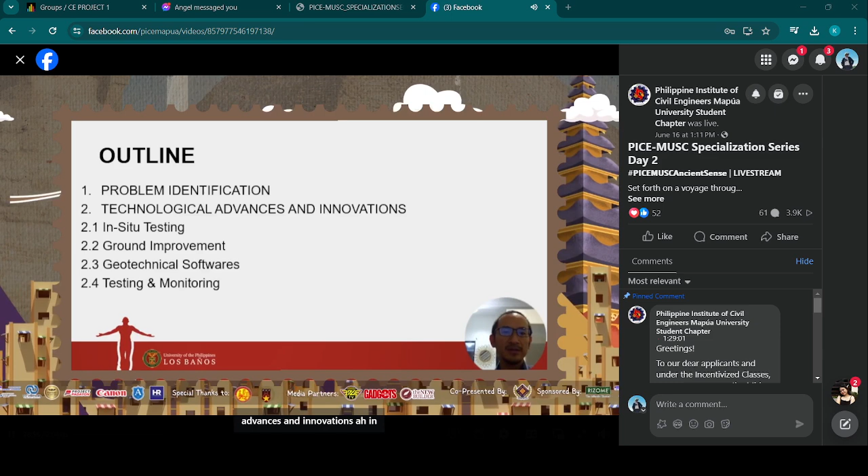So for the outline of my presentation, before we discuss innovations, landslides or ground improvement, let's identify what the problem is. Then for the second part, we're going to talk about the technological advances and innovations in geotechnical engineering. Hopefully I can include my work experience and my current work as professor in the Department of Civil Engineering here in UP Los Baños. The question we need to answer is why is there a need to innovate? The innovations I will discuss are in the context of the Philippine setting.

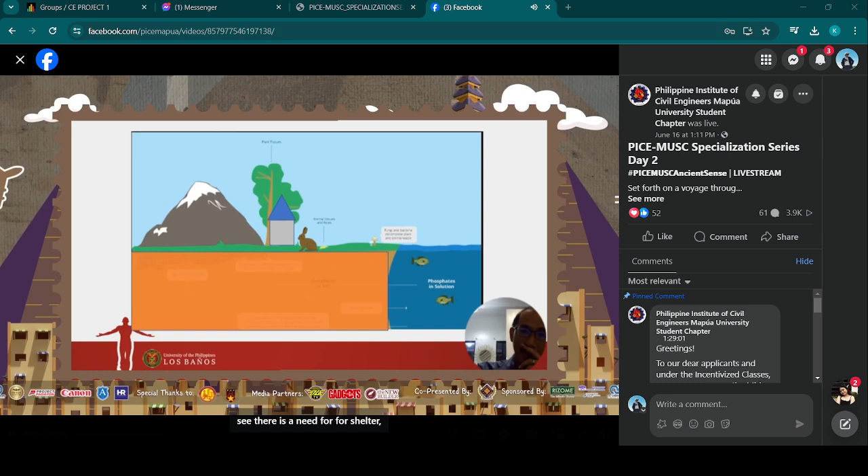So first off, as mentioned in the outline, let's talk about what the problem is. In this figure, we can see nature as it is. The problem starts when man interferes with nature. Man will create housing, since there is a need for shelter. So ang gagawin ng tao is gagawa siya ng bahay. In the process of building this house, makikita natin na maaapektuhan niya itong puno, so mapuputol itong puno. Hindi din magtatapos. Man will build further, since dumadami yung population ng tao, so there is a need for more housing.

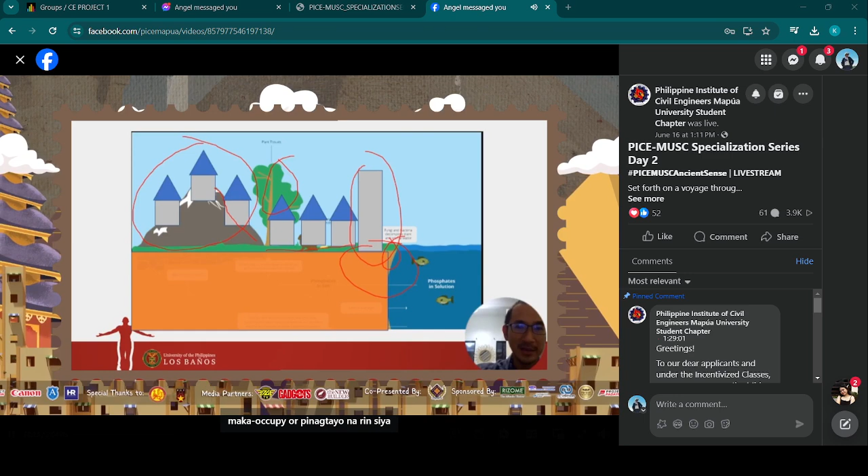Hindi pa din magtatapos ang intervention ng man sa nature. Since wala nang space, natayuan niya na yung flat area, so naputol niya na yung puno. Nagtayo na rin siya ng mga high-rise na building para mas maraming maka-occupy, o nagtayo na rin siya sa bundok na medyo matarik.

Pero hindi pa din magtatapos ang problem. Magre-reclaim na rin siya sa body of water. So when I say reclaim, tatambakan niya ito ng lupa, then magtatayo siya ng further structures. You can see this happening right now sa atin sa Manila Bay - madaming reclamation projects ang nangyayari doon.

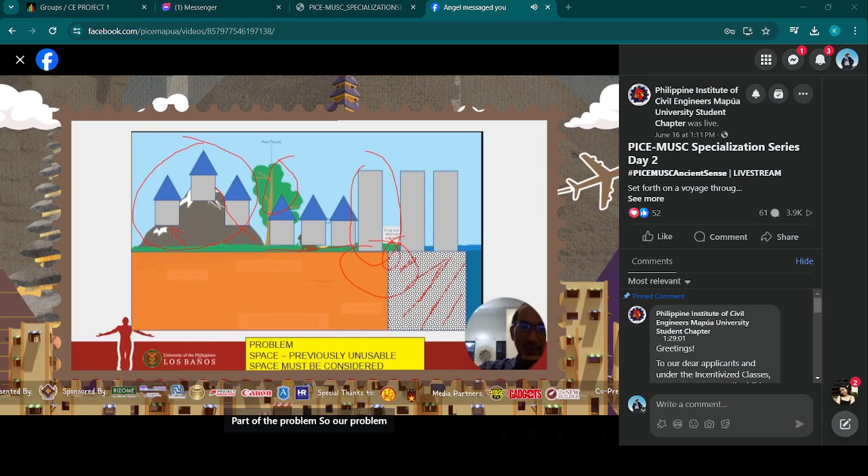So part of the problem, our problem identified is space. Since dumadami yung population, previously unusable space must now be considered for human expansion. So that's problem number 1.

So in situ soil. First off, before defining in situ soil, let's start by defining some civil engineering materials that we learned in class.

Concrete is an engineered material. Pwede nating i-modify ang concrete strength, FC prime of concrete - it can vary from 2,500 to 6,000 PSI. Kaya nating specify yan, basta sasabihin lang natin doon sa concrete supplier natin kung ano ang concrete strength na kailangan. It can either be 28 days or early strength. Depende pa rin sa requirement ng tao, it can be engineered.

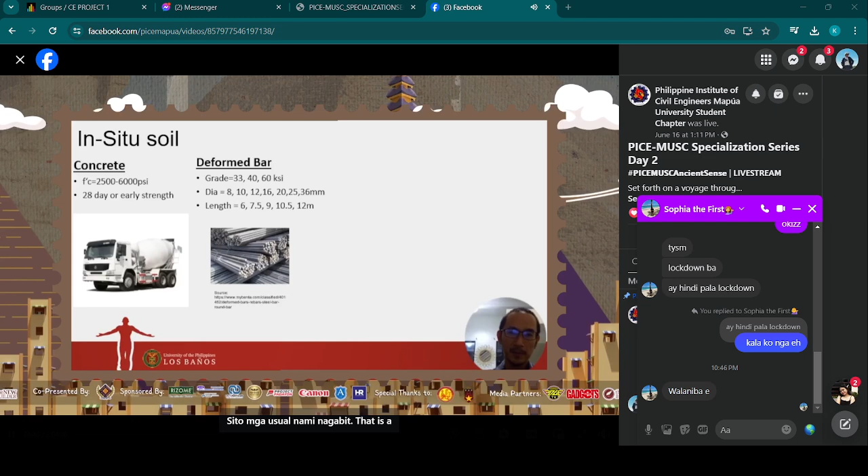Deformed bar, so steel - it is available in grade 33, 40, 60 KSI. The diameter can be 8, 10, 12, 16, 20, 25, 36 mm. The length can be from 6, 7.5, 9, 10.5, 12 meters. This is also an engineered material, man-made. Ito yung mga usual na ginagamit natin sa construction.

Structural steel is available in different shapes and sizes. Strength as per specifications, length I believe 6 to 12 meters. In this figure, this is a wide flange. I believe nakapag-steel design na naman siguro kayo, so I think you're aware of this material.

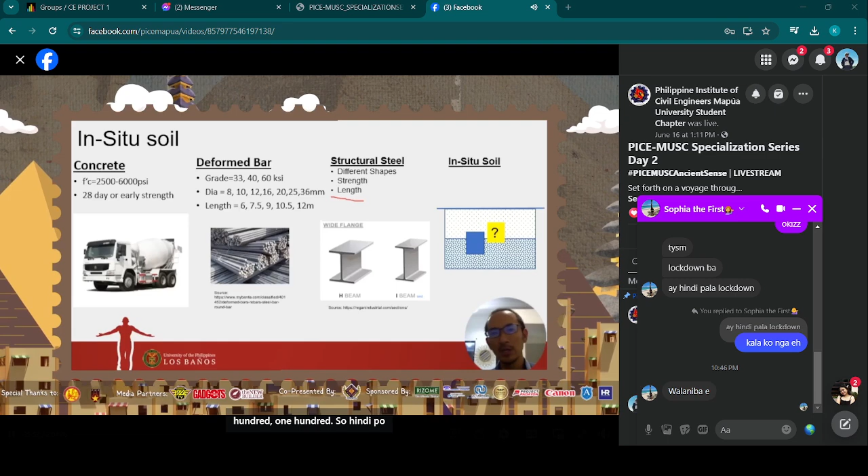Well now, tumbukin din natin yung ating main point - in situ soil. In situ soil is a question mark, hindi siya engineered material. Pag pupunta tayo sa site, yung lupa doon, it is as it is. Hindi natin pwedeng utusan yung soil na magkaroon siya ng bearing capacity na 300, 200, 100. Hindi po pwede yun - it is what it is.

A problem with sands is it can be a problem if it is in a loose saturated state - saturated, basa, all the voids are being occupied with water.

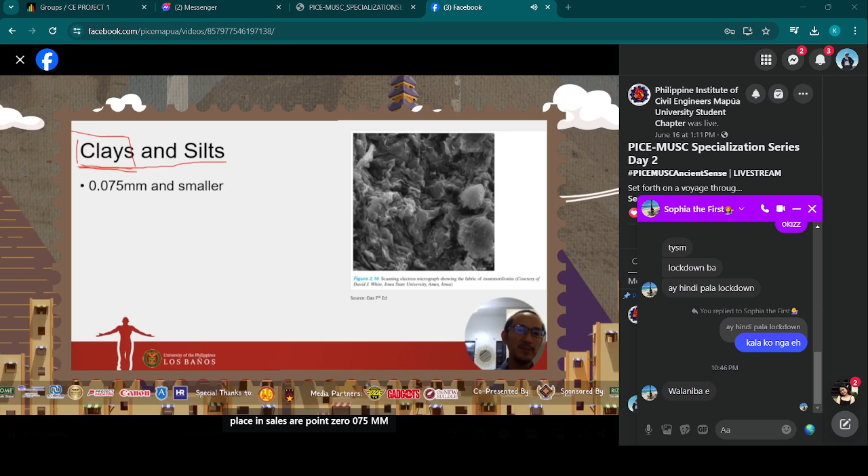The next major classification of soil is clays. Particularly mag-focus tayo sa clays and silts, pero mag-focus tayo sa clays. The figure on the right is a picture of clays - kung makikita nyo, hindi siya ganun kasing linis ng picture ng sands as compared to kanina. The range of size of clays and silts are 0.075mm and smaller - these are what we term as fine grained soils. Its consistency can be termed as soft to hard.

Further classification - ang difference ng silts versus clays is silts is inert, hindi siya active, while clays are very active pag nahahaluan ng tubig. The problem with clays is its high affinity for water - may absorb 100 times its own volume. It can also shrink or swell - it has high shrink swell potential, or a high potential for volume change. As a note, it is because of clays that geotechnical engineering was born - dahil sa problems na na-encounter ng man sa clays, kaya na-born yung geotechnical engineering profession.

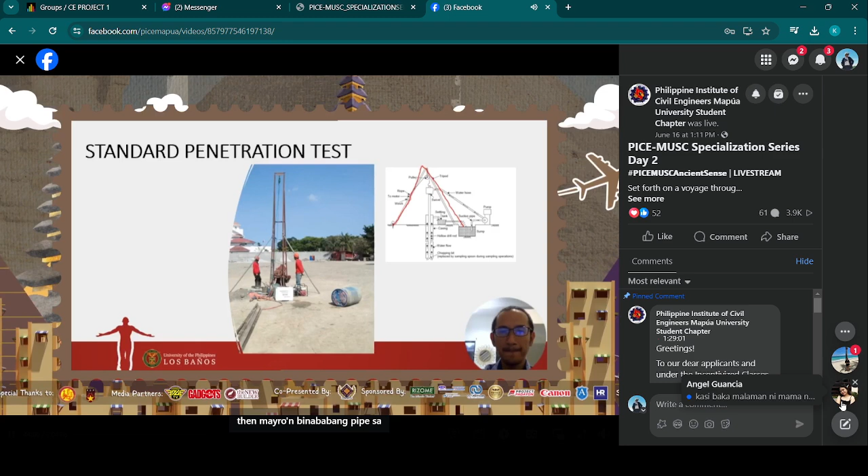So the objective of the standard penetration test is to obtain soil samples, to approximate the in situ soil strength, and to measure the ground water table through the hole drilled in the ground.

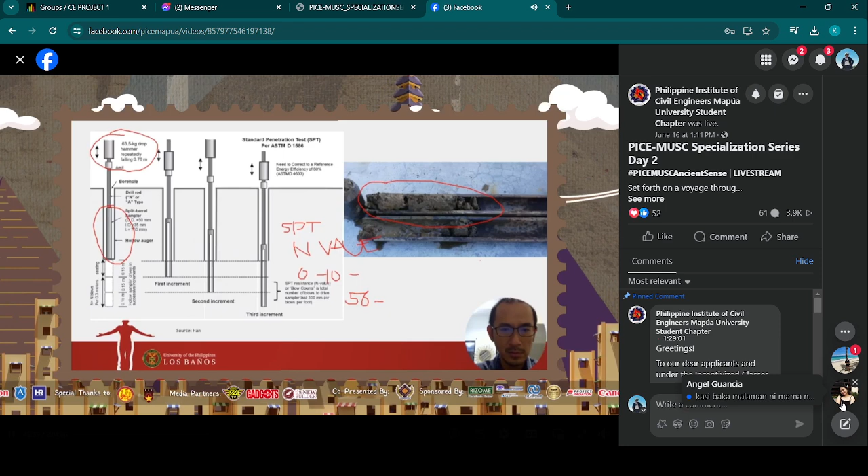So the problem with the SPT is it's prone to human error and it is slow, because the process is somewhat manual.

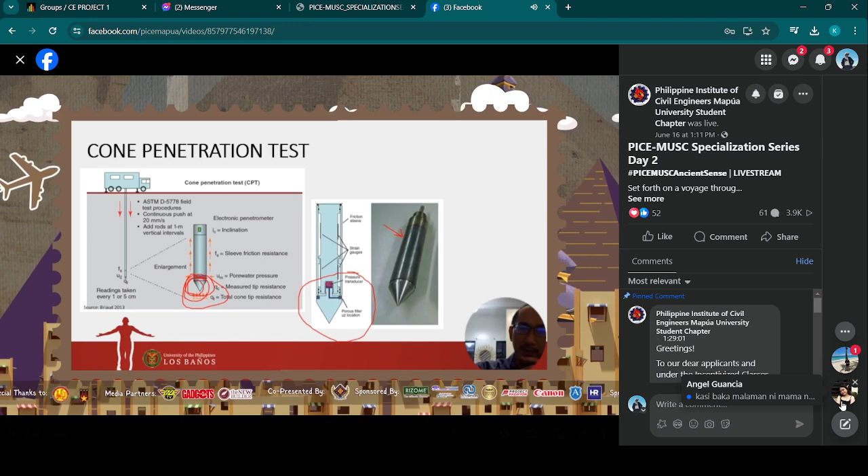So ang limitation lang nito is this is ideal for soft to stiff clay and loose to medium dense sand only, kasi nga tinutulak lang siya. So after ma-reach niya tong stiff clay or medium dense sand, titigil na, or madadamage na yung cone. Kaya hindi na pwede siyang gamitin after that.

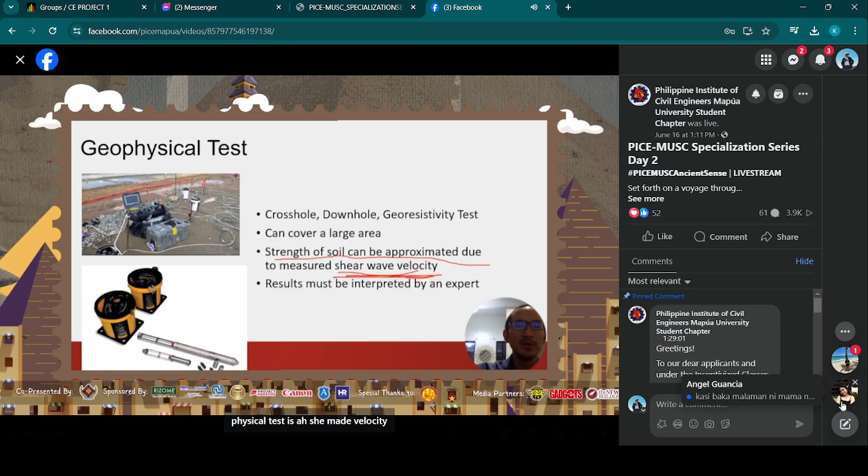So geophysical test, these are more on electronic test na rin. Marami siyang types - cross-hole, down-hole, georesistivity. Advantage nito is this can cover a large area, at yung strength of soil can be approximated due to the measured shear wave velocity. Ang makukuha po natin dito sa geophysical test is shear wave velocity, and results must be interpreted by an expert.

So another purpose of geophysical test is to detect cavities. So dito sa project site, dahil sa geophysical testing, na-identify yung merong mga voids dun sa cavity sa site. So ito po yun.

So very important po yan kasi ayaw natin na yung building natin ay papatong sa mga ganyang site. Kung merong mga voids, kailangan meron tayong gawing engineering intervention.

So understanding the geology of the site would be very helpful for this project. Tong Boracay Island, very famous siya na medyo maraming voids dyan sa area.

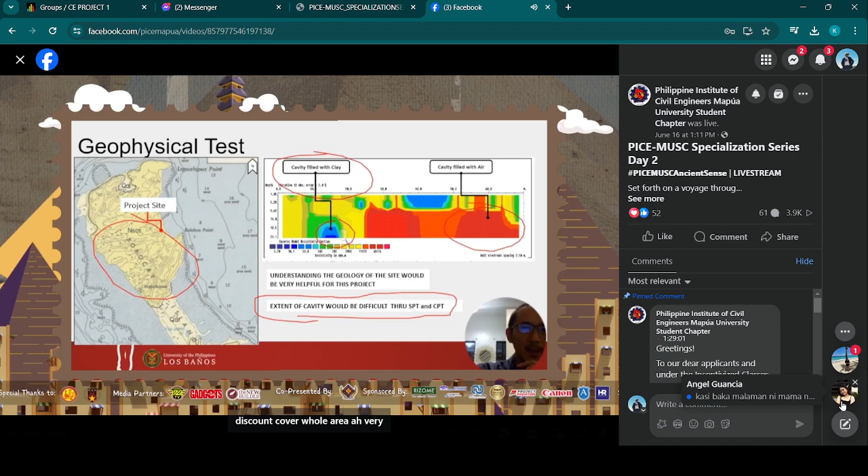So the extent of the cavity would be difficult through SPT and CPT kasi single point lang yung minimeasure natin. So dito sa geophysical testing, this can cover a whole area, very wide area.

So as a summary sa mga diniscuss kong in situ testing: for SPT, disadvantage is slow. For CPT, advantage niya is accurate for soft to stiff clays, pero may encounter refusal after medium dense sand and hard clays. Geophysical testing can cover a large area on one test alone, so this needs a pre-drilled hole usually from an SPT borehole.

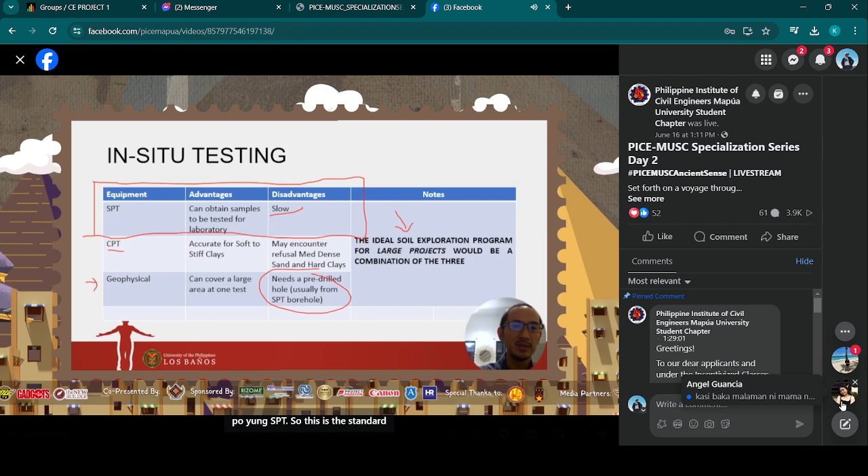So a note for this testing is the ideal soil exploration program for large projects would be a combination of the 3. Pero kung yung mga typical na testing natin for a 3-story house or a 2-story house, okay na po yung SPT. So this is the standard na ginagamit natin dito sa Pilipinas.

So now, let's move forward to ground improvement. So this is a question that I ask my students in my introductory geotechnical engineering class.

So the question is: if I stomp my feet on the ground with loose sandy soil, am I performing ground improvement? The answer po dyan is yes. When you're stomping on the ground with loose sandy soil, you are performing compaction of the ground, kasi yung energy tinatransmit nyo sa ground ay nagkakaroon siya ng reaction na nalalessen niya yung voids dun sa soil.

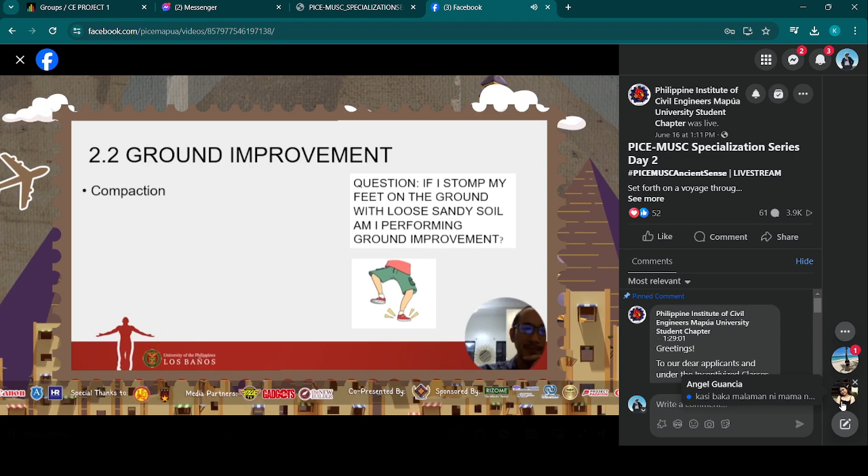So yung mga ground improvement methods na i-discuss ko sa presentation na ito: compaction, soil replacement, geosynthetics, ground improvement using grouting, ground improvement using stone columns, then screw piles - maybe hindi ko na ito idiscuss.

So based on my MS teacher, basically nung 2000 and earlier, so 1980s, 1990s, meron lang - I believe tatlo - na klase. So tatlo lang yung ginagawa natin dati.

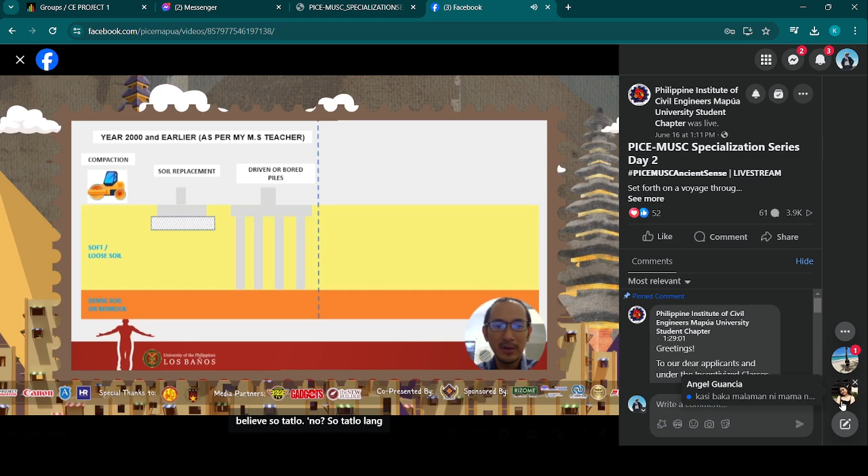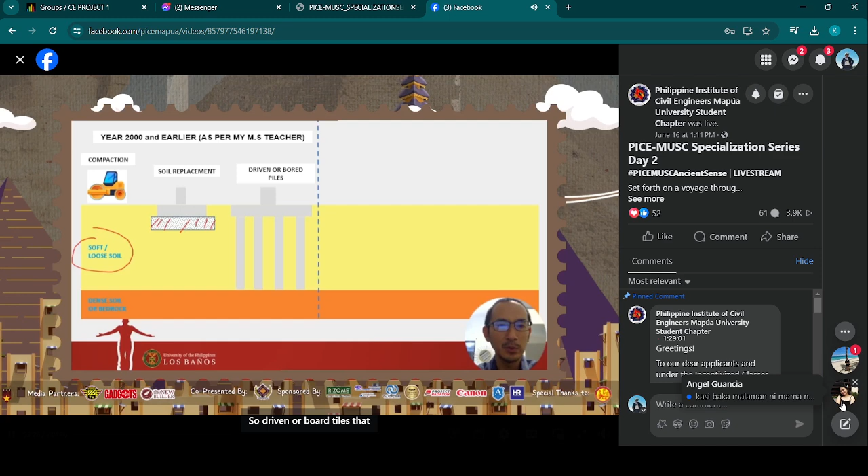So either compaction - kung ang soil condition ko ay soft or loose soil, pwede ako mag-compaction. Soil replacement - ibig sabihin papalitan ko yung soft and loose soil underneath ng aking pundasyon, papalitan ko siya ng engineered fill. Or I will resort to driven or bored piles, na ang concept ay to transfer the load from the building to the competent strata, which is the dense soil or the bedrock.

So as we innovated, as nagkaroon ng maraming research, dahil nga yung solutions dati available was either deep or for shallow foundations, so nagkaroon ng innovations. So marami ng ground improvement techniques ngayon. These are ground injection, jet grout or stone columns, or screw piles. So this can be an alternative to driven or bored piles or soil replacement.

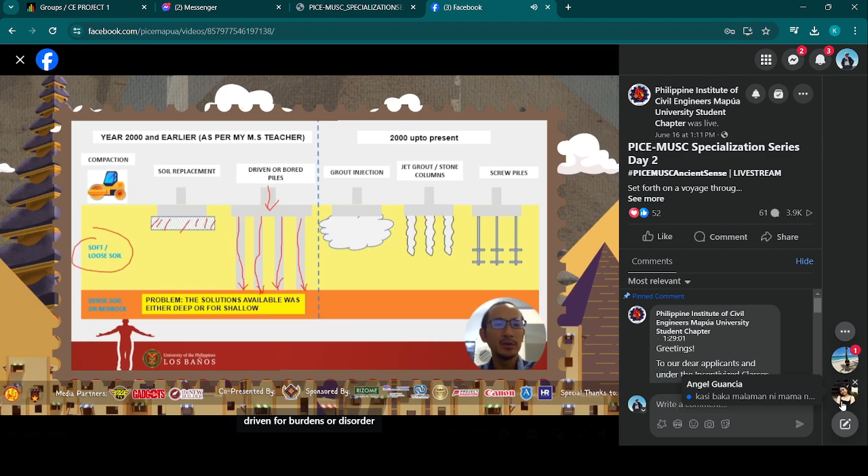So sa ground improvement, these ground improvement methods can be an alternative to deep foundations. So, compaction equipment. This is a smooth wheel roller, so vibratory roller. This provides 100% coverage, and take note, this is best for cohesionless soils. So sa mga sandy soils, this is best for that.

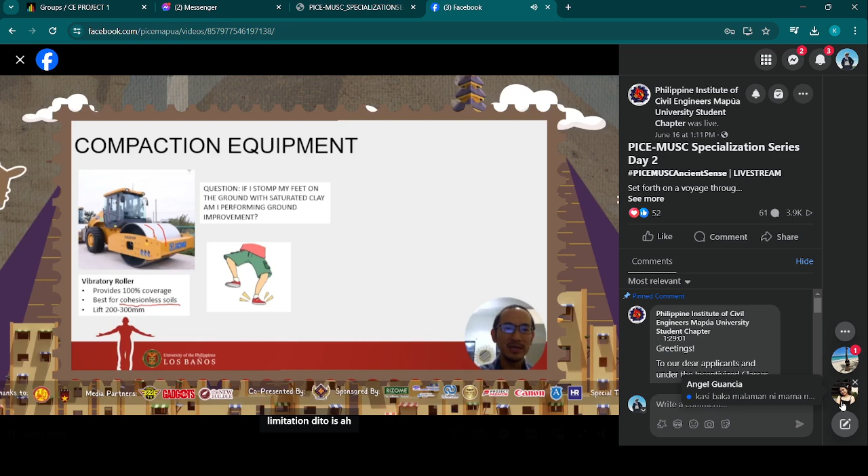Ang limitation nito is related to this question. If I stamp my feet on ground on saturated clay, am I performing ground improvement? Kung naalala nyo, this is the same question kanina, but kanina ang sinabi ko is loose saturated sand. So ngayon, if I stomp my feet on ground with saturated clay, am I performing ground improvement? The answer to that is no.

So magkaiba po ang properties ng sand sa clay. If you use the same method, if you're stamping your feet, you're simply gonna displace the clay. So ang answer po dyan is no. So ang ideal method po to use if you have clay soil on your site is a sheep's foot roller. So ito po yun, meron siyang mga large projections sa kanyang drum.

Unlike dito sa figure on the left, smooth wheel roller siya. This is best for cohesionless soils. And the sheep's foot roller is best for cohesive soils. Pakitandaan po yun kasi marami pong hindi nakaka-alala nun sa site, sa actual practice.

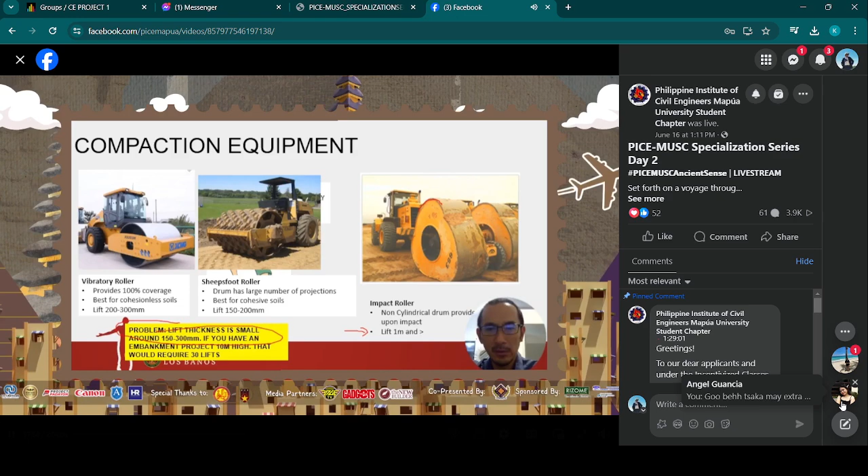Another thing that I would like to discuss, we're done with compaction, so geosynthetics. Geosynthetics are manufactured fabrics made of polymer that are used in soil, and they have the ability to separate, filter, reinforce, protect, or drain. Marami pong types of geosynthetics: geotextile, geogrid, geonet, etc. And each of them has its separate function. Geotextile will check all the boxes.

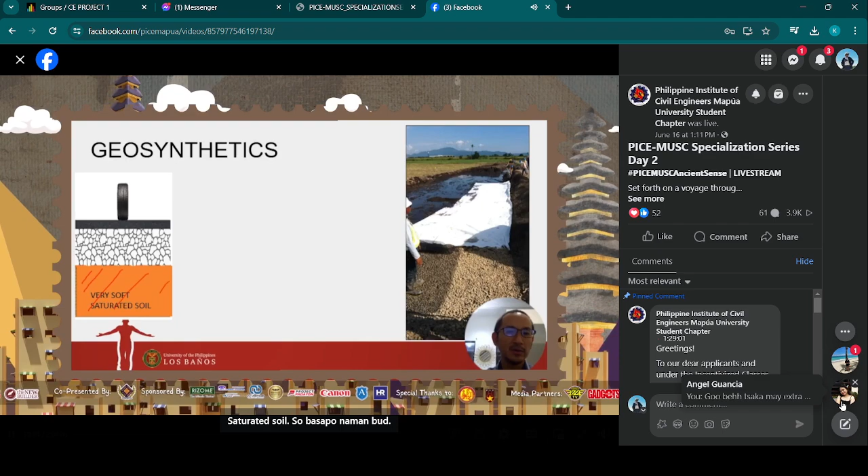Tingnan lang natin in a nutshell kung paano siya gumagana. For example, we have a road project. Ang in situ soil natin is very soft, saturated soil. Basa po na malambot yung ating lupa. We will put these stone layers, which are our base course, and this is our pavement, and ito po yung top of pavement natin.

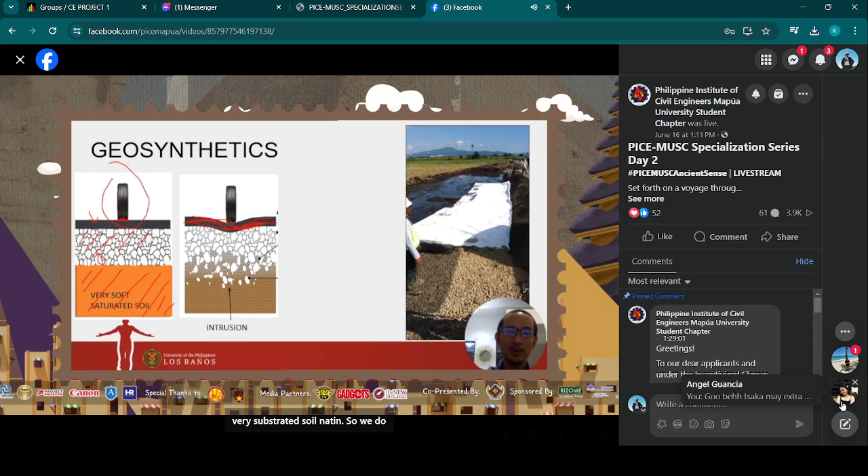So what will happen pag ito po ang ginawa natin? Magkakaroon ng intrusion, kasi yung gravel layers will intrude sa ating very soft saturated soil. Kaya yung mga pavement natin, kasi ang design niya as flexible, nag-fail, dahil nagkakaroon ng intrusion. Yung base course layer natin is humahalo dun sa very soft saturated soil. So we do not want that to happen.

That is where geosynthetics comes into play. Lalagyan natin siya ng geotextile separator. The function of the geotextile separator is para hindi humalo yung base course layer dun sa very soft saturated soil. An example is in the figure on the right. Makikita natin yung soft saturated soil layer, naglatag tayo ng geotextile, then eventually lalagyan din natin ng gravel layer. This is an embankment project.

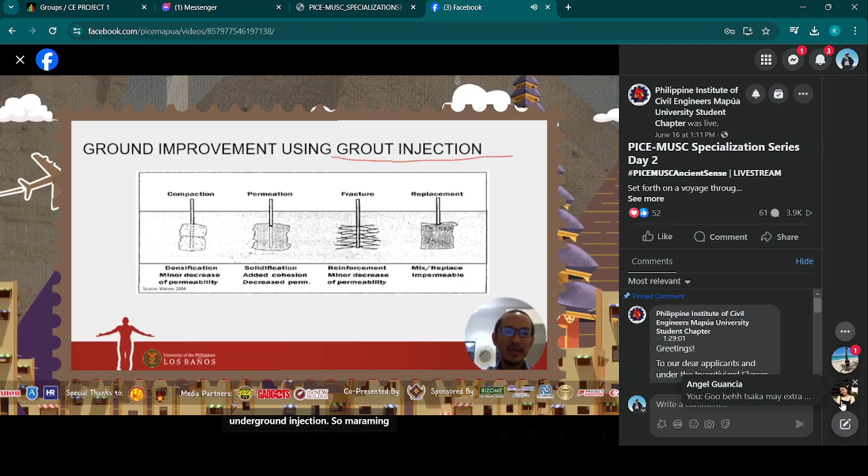So that is basically the function of the geotextile in this case. Moving forward, let's discuss innovation and ground improvement. There are many types of ground improvement. One type is ground improvement using grout injection. Under grout injection, marami pa ring types: compaction grouting, permeation grouting, fracture grouting, and soil replacement. I will leave that up to you for your studies.

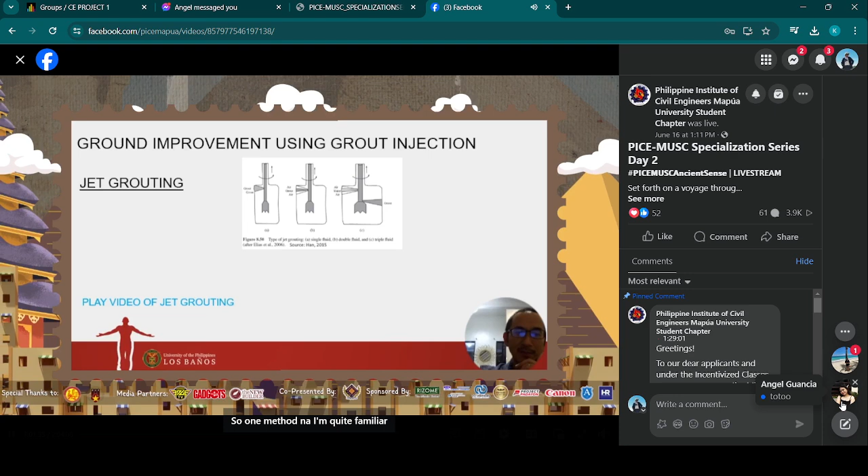So one method I'm quite familiar with is ground improvement using grout injection, particularly by use of jet grouting. So basically jet grouting is a method wherein we inject high pressure cement into the ground and we mix the cement with the in-situ soil.

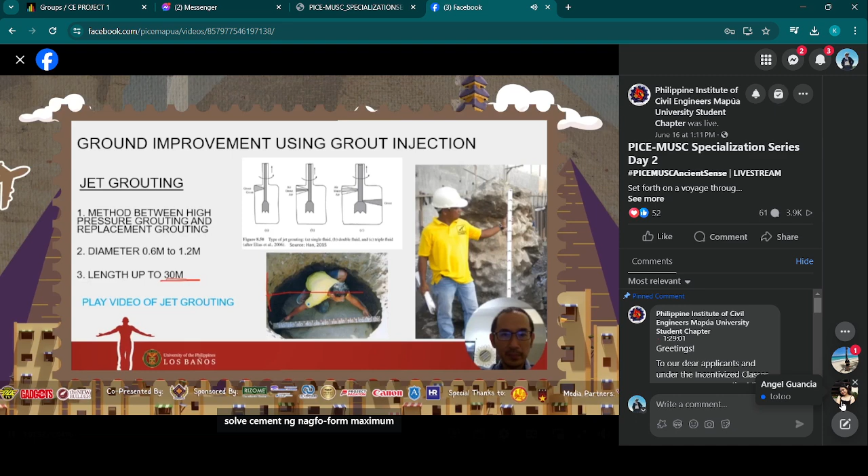So the diameter of the soil cement formed is around 0.6 meters to 1.2 meters. As per my experience, the depth that can be jet grouted can reach 30 meters. Unfortunately, I can't play the video of jet grouting, but these are some pictures. So the diameter of the soil cement formed, maximum as per our experience, is 1.2 meters.

Then this figure on the right is an example of a jet grout soil cement column. We just pulled it out of the ground as per client specifications, because the client wanted to see if soil cement is really being formed. So this is the proof that jet grouting was effective for this project.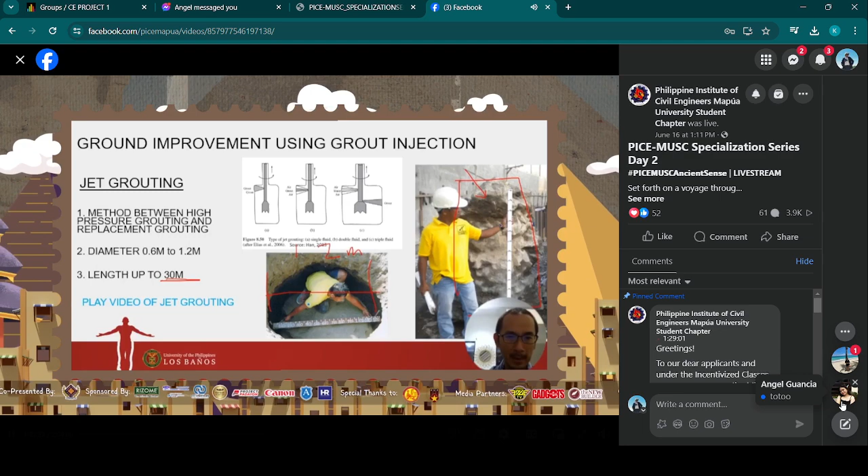So basically, based on this figure on the left, what is particularly good about jet grouting is it is applicable for all soil types, from gravel, sand, silts, and clays. Problems identified with grouting are the quantification of the grout or the cement that we are putting into the soil and the measurement of the corresponding improvement.

So the next topic that I would like to discuss is about slope stabilization or slope stability. Before we get into slope stability, let's first discuss the basic concept of a slope. In the figure on the left, this is our slope, and this is the sliding plane. What we need to consider is the weight of this slope mass and the strength at this interface.

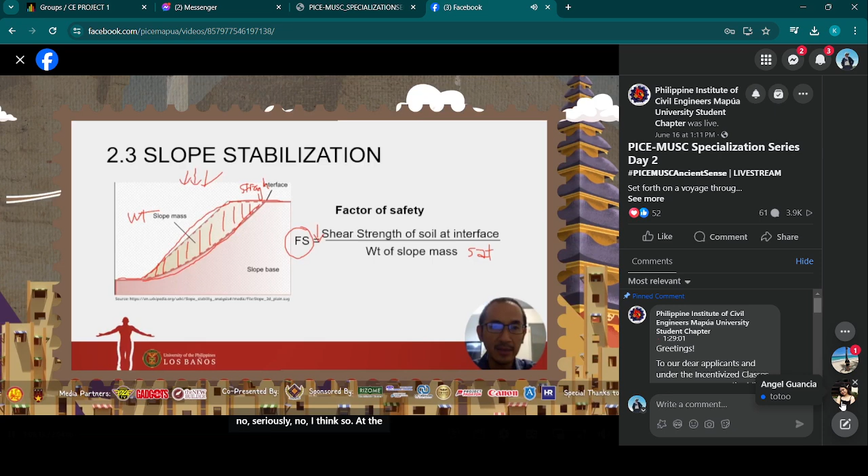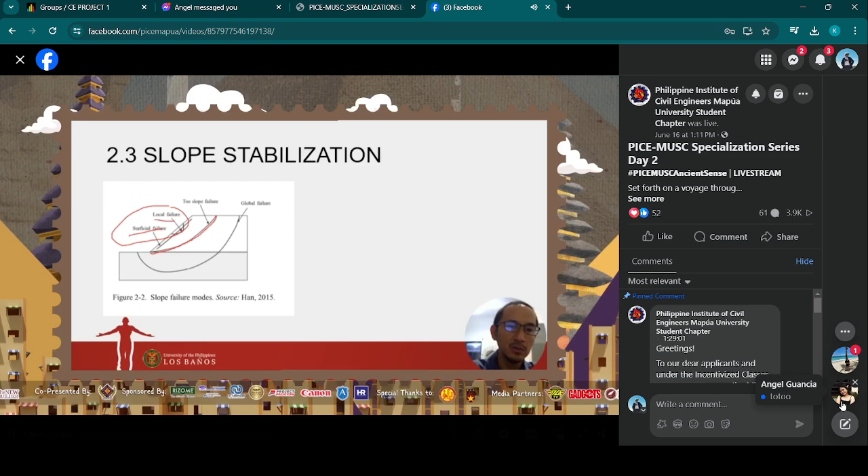There are basically four types of failure. Superficial failure and local failure are the shallow types of failure, more like erosion type. Toe slope failure is where the slip circle ends at the toe. Then global failure refers to deep-seated landslides, where the failure radius is large and extends beyond the toe.

In my experience, of all the subfields in geotechnical engineering, slope stability is the most critical. You might ask why I say that. Because the failure of a slope may lead to loss of life. That's what we most want to avoid. That's what's frightening about slope failure: it may lead to loss of life.

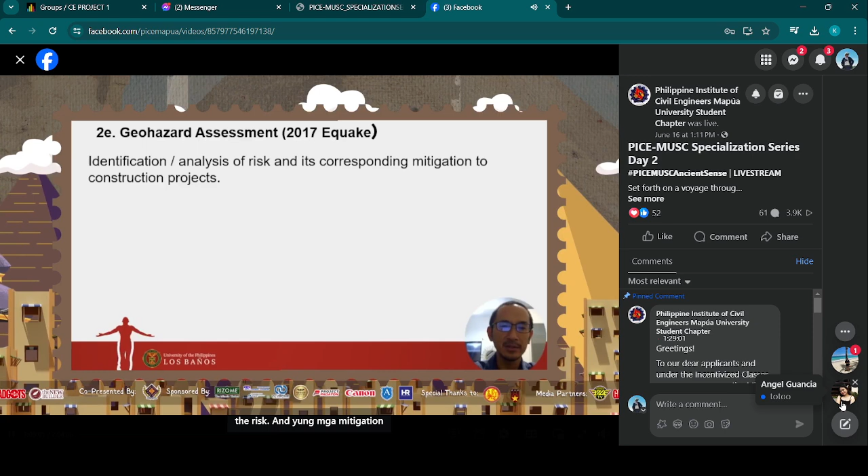So in the following slide, these are my experiences in slope assessment or slope stability. This is a geohazard assessment project in Leyte, because of the 2017 earthquake. So basically my task there was to identify and analyze yung risk and yung mga mitigation sa mga construction projects ng company namin at that time.

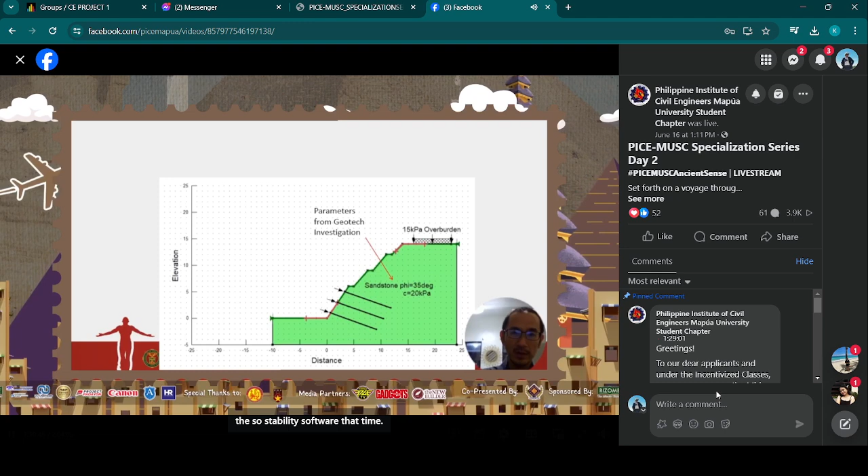So what I did there, ang ginawa natin is nagkaroon tayo ng design. So analysis and design. So this picture now is from the slope stability software na ginamit ko that time. So this is the building for your reference and this is yung ating cut slope. So dahil kinat natin yung slope, kailangan natin i-analyze for slope stability yung ating slope. So these are the parameters that I used. So based on the geotechnical investigation, bato yung ating site. So ito yung corresponding cohesion and friction ng ating site.

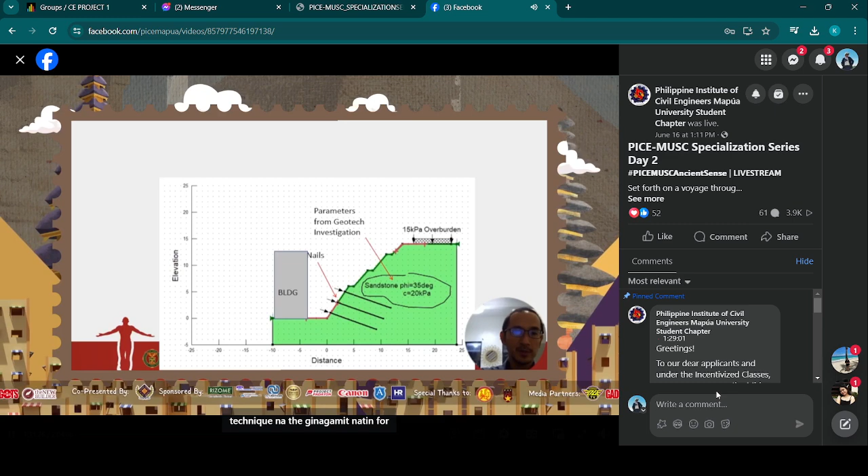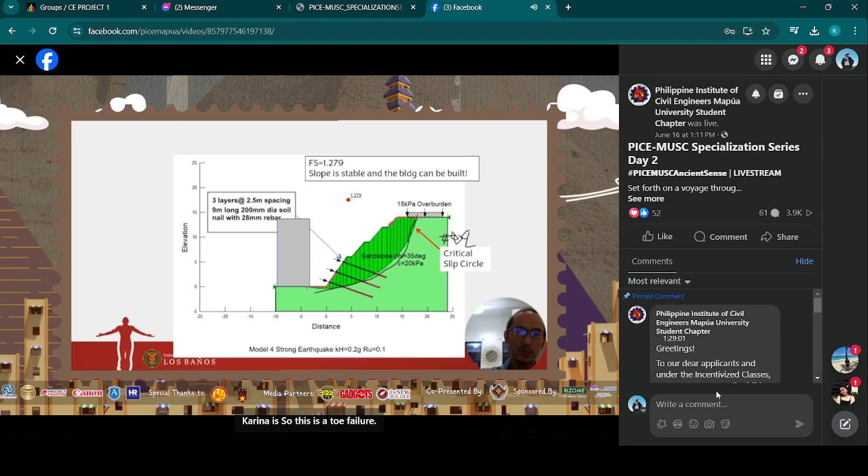Then I introduced nails. So these are soil nails. So these are common technique na ginagamit natin for slope stability, so slope stability mitigation. So pag meron na tayong input, then meron na tayong mitigation, then we can proceed with yung analysis natin. So based dito sa ating analysis, yung critical slip circle na produce ng ating analysis is, if naalala niyo yung kanina sa figure ko, this is a toe failure. Kasi malapit sa toe yung ating failure.

Then ang FS niya is 1.279. So for slope stability analysis, basically we want a factor of safety greater than 1. So dito sa ating example, FS is 1.279, so we can conclude that the slope is stable and the building can be built.

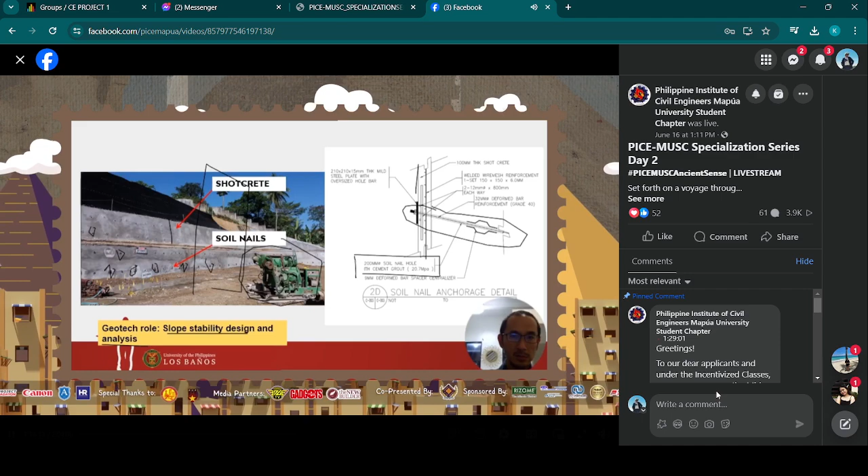So the next topic that I would like to discuss is about the recent advances in geotechnical softwares. Siyempre, slope stability. Then let's talk about SSI and ito, no? So yung most recent na ginagamit is yung GIS mapping. So basically, you can perform slope stability using manual calculation or, yung time namin during the masteral, Excel pa yung ginagamit namin. So the problem with Excel calculations is you can only analyze one slip circle at a time, and kailangan mo mag-analyze ng multiple slip circles. So kailangan mo gumamit ng AutoCAD, Excel. So napakatrabaho niya. You can analyze only one slip circle at a time.

Then ang naging improvement nun is yung mga slope stability softwares. So this is a two-dimensional na slope stability software. Ang naging advancement nito is nakaka-analyze na siya ng multiple slip circles at any given time. So mas naging madali na yung analysis and mas naging convenient na.

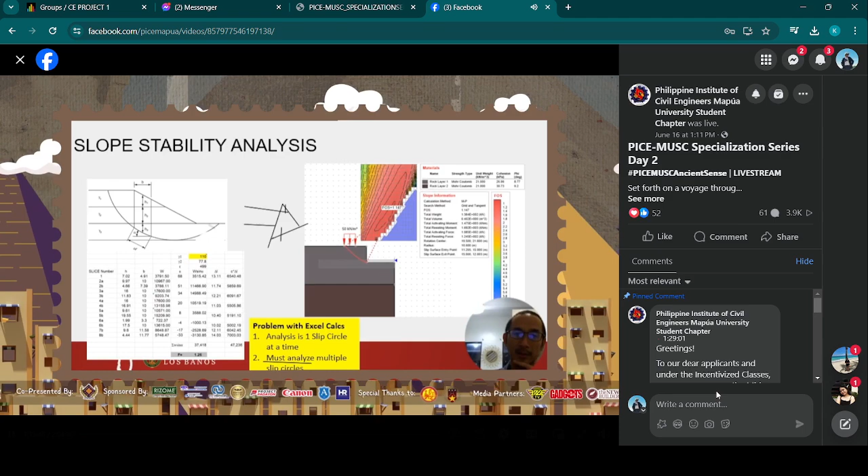Then recently, meron nang lumalabas ng mga 3D slope stability analysis software. So these are very powerful softwares na nasisimulate niya talaga yung actual ground condition. So merong nag-offer ng mga free na dati. So one is yung Plaxis. Kaso ngayon wala na yata.

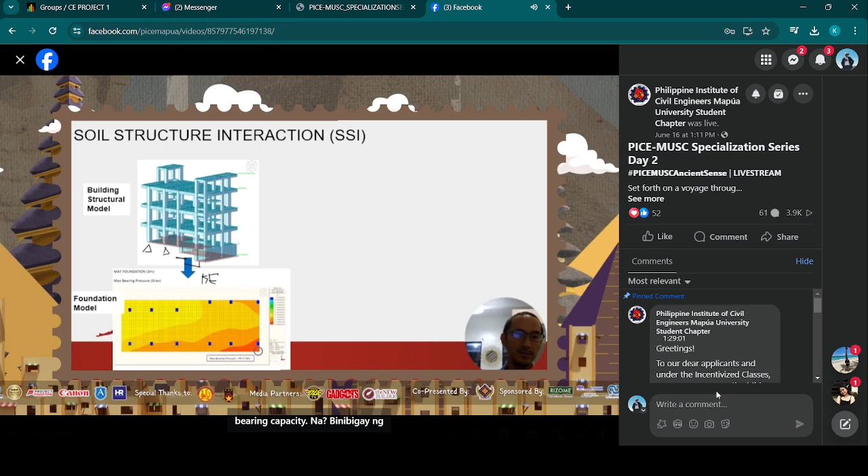So then you design your foundation. So this is also the role of the structural engineer. So ang nagiging basis mo dito is yung bearing capacity na binibigay ng geotech. Bearing cap. Sorry, paano nasulat? So basically, this is the role of the structural engineer.

Then on the figure on the left, this is a geotechnical analysis software. So basically, we're simulating yung foundation na ginawa ng structural engineer. Then we're doing a settlement analysis. So this one, sorry, medyo malabo lang. Pero basically this is settlement analysis. So this is being done on 2 or maybe 3, tatlo pa nga, no?

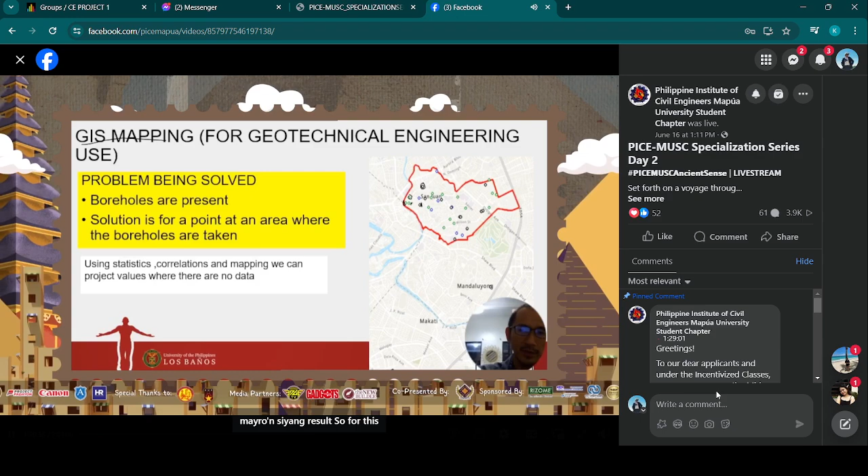So what we want, we want to utilize GIS mapping para maka-generate tayo ng bearing capacity map for this particular area. Kasi marami tayong data at any given points, so gusto natin gumamit ng GIS mapping using statistics, correlation, so we can project values kung saan walang data. No? So kung dito sa area to wala, we can use GIS mapping. So para siya na yung mag-interpolate ng data dito sa mga walang data, then we can come up with a bearing capacity map. So an example nito is this bearing capacity map from Biñan, Laguna.

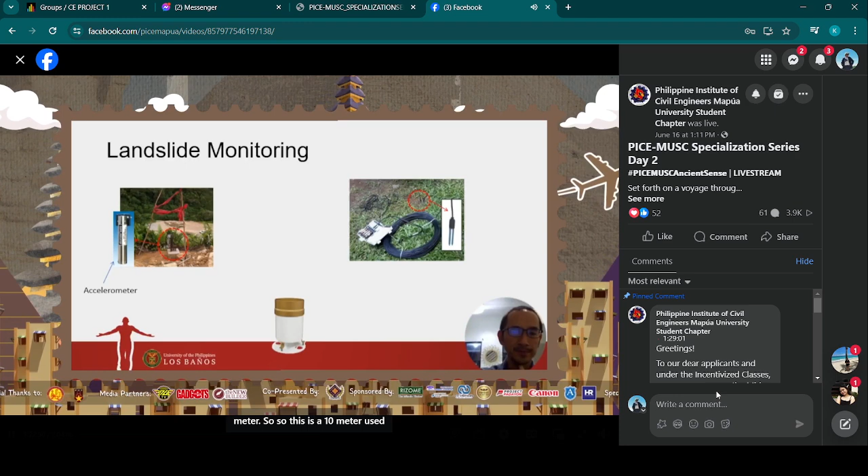So, advances in testing and monitoring, particularly in landslides and deep excavation monitoring. So for landslide monitoring, these are typically what we use, particularly sa ginagamit namin sa company namin dati. So we use a tilt meter. This is a tilt meter using the concept of an accelerometer. What we want to detect in the tilt meter is movement or tilt along the slope.

We use soil moisture sensors para makuha natin yung moisture content at any given time sa slope. Then we use a rain gauge, which measures the amount of rainfall at an area of interest. So the combination of the three: the tilt meter to measure tilt along the slope, the soil moisture sensors at varying depths along the slope, then meron tayong rain gauge. Lahat ng data ng tilt meter, soil moisture sensor, and the rain gauge, papasok yun lahat dito sa ating data logger.

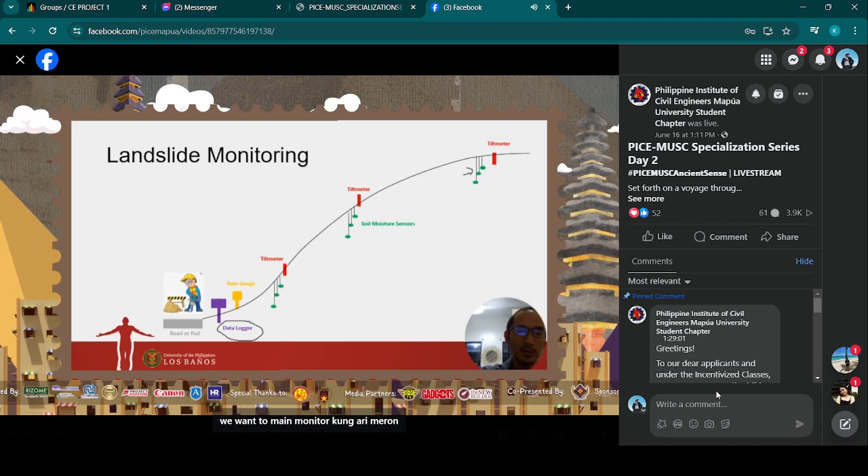So basically ang importance nito is we want to monitor kung meron tayong construction project or meron tayong high value building dito sa toe ng slope. So any impending movement, at least mawawarn yung workers or yung mga tao sa building na mag-fail yung slope. So an example data sa project, ito po yung ating sample data that I can present.

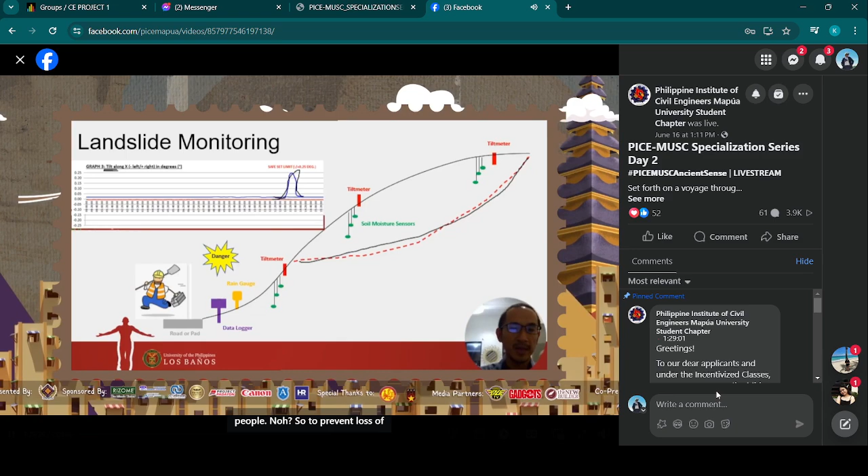So, that is the value of these landslide monitoring devices. This can serve as an early warning device for people, to prevent loss of life. The concept of that monitoring we can also apply hindi lang sa slopes, pwede natin siya gamitin sa mga buildings, particularly sa mga congested areas na maraming tinatayong mga building. An example of this is this picture.

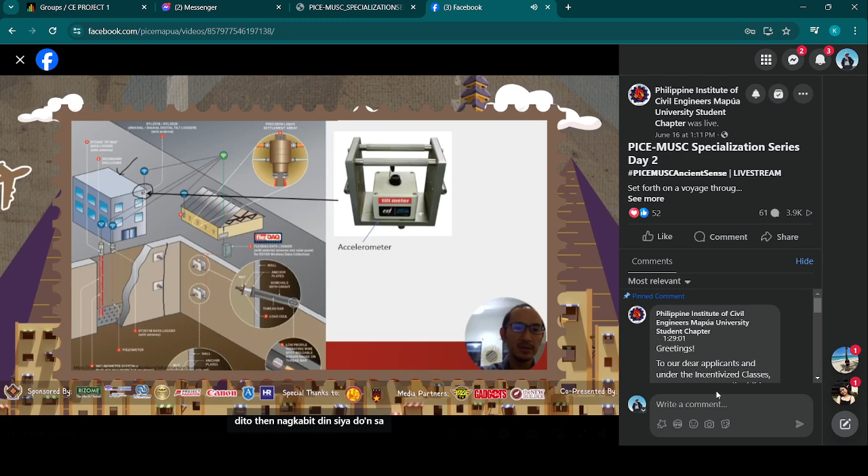So these are also a series of accelerometers. Basically, we want to measure again yung tilt. So kung nagkaroon ng failure itong deep excavation, magre-reflect yun dito sa building, sa readings sa tilt meter natin dahil nakakabit siya dito.

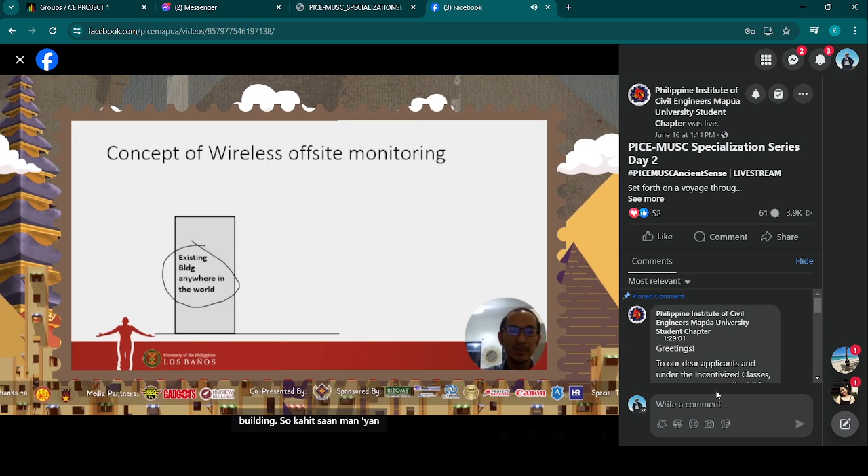So, pag kinabitan natin yan ng tilt meters, basta nakakonekta yan sa Wi-Fi, then we can access that kung nasaan man tayo. We can access it in our cell phone, in our laptop, or in our gadgets or iPad.

So that is ginagawa nila ngayon. Pag sinabing wireless off-site monitoring, basta yung mga equipment natin for monitoring nakakabit sa Wi-Fi, we can access it kahit wala tayo mismo dun sa site. So that is a common practice na ngayon.

So this is a typical project na na-involve ako last pandemic, so 2020 or 2021. Building monitoring, so monitor namin tong building na to dahil merong deep excavation project. So basically this is a snapshot of the daily values ng tilt meter. Ang ayaw natin is tong values na to biglang tumaas, dahil pag tumaas to, ibig sabihin nagtitilt yung ating building, so we must warn yung owner. Thankfully, medyo stable naman yung naging readings natin.

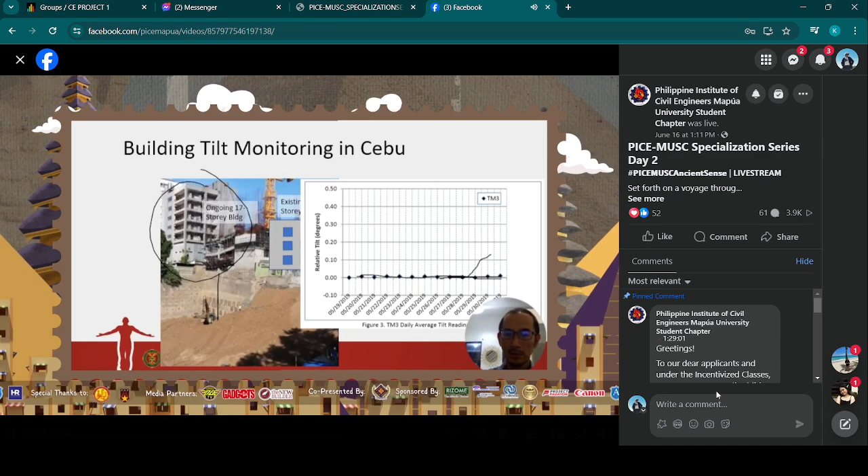So medyo malapit na ako matapos. Then I'd like to talk about some thesis topics related to landslides from my past students.

I'd like to talk about prediction of landslide occurrence through precipitation threshold, then some improvement of shear strength. So these are laboratory tests, itong improvement of shear strength.

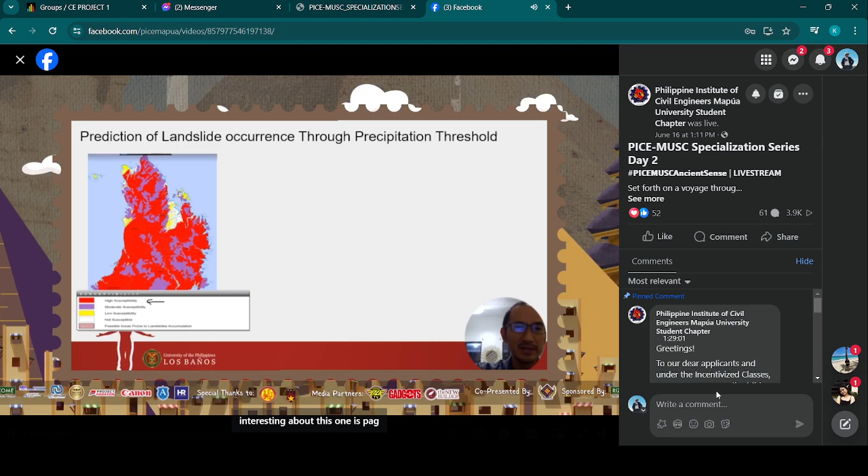This was a topic of my former student na nakatira sa Catanduanes. As you can see sa Catanduanes, ang landslide susceptibility map niya, yung island of Catanduanes, is pulang-pula. Medyo malabo lang yata. So if you look at the susceptibility map from PHIVOLCS, pulang-pula halos yung Catanduanes. What is also interesting is pag pumapasok yung bagyo, dito siya parati pumapasok. Ang unang dinadaanan ng bagyo is yung Catanduanes. So my student was able to get rainfall data kasi may mga rain gauge ang PAGASA.

Along these red circles, meron siyang nakuhang mga landslide data from DPWH. Itong mga points na to, mga succeeding points, is landslide data na nakuha niya from past records from DPWH records. Yung landslide occurrence niya is merong date and merong magnitude ng landslide, kung heavy, kung deep, kung local. Yung rainfall data naman, meron from rain gauge from PAGASA stations distributed along the circumferential road of Catanduanes. Yung slope dun sa kanyang area of interest is from digital elevation model from USGS.

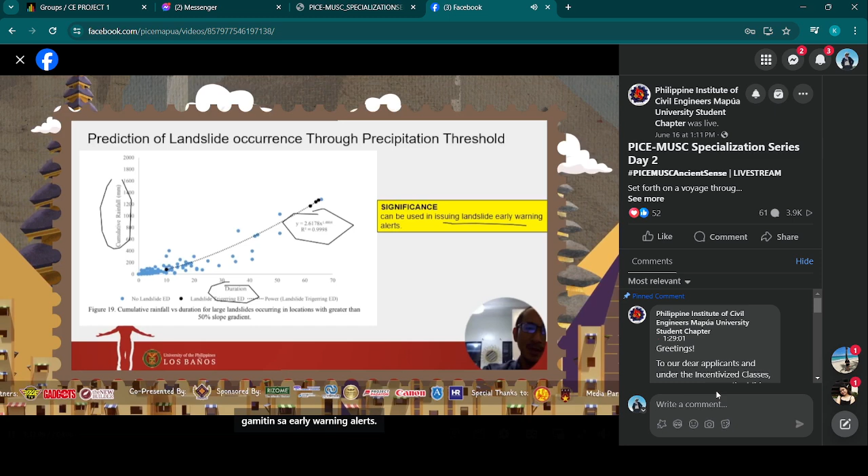From her study, dahil nga meron siyang data, nagkaroon siya ng statistical analysis, mga graph na ganito. Nagkaroon siya ng mga equations relating cumulative rainfall to the duration of rainfall. Then na-plot niya yung mga landslide data niya, so nagkaroon siya ng graphs showing na pwedeng gamitin sa early warning alerts. Pag na-exceed yung cumulative rainfall and yung duration, mapipredict nitong equation na to yung landslide occurrence. So that is the significance ng naging thesis na to.

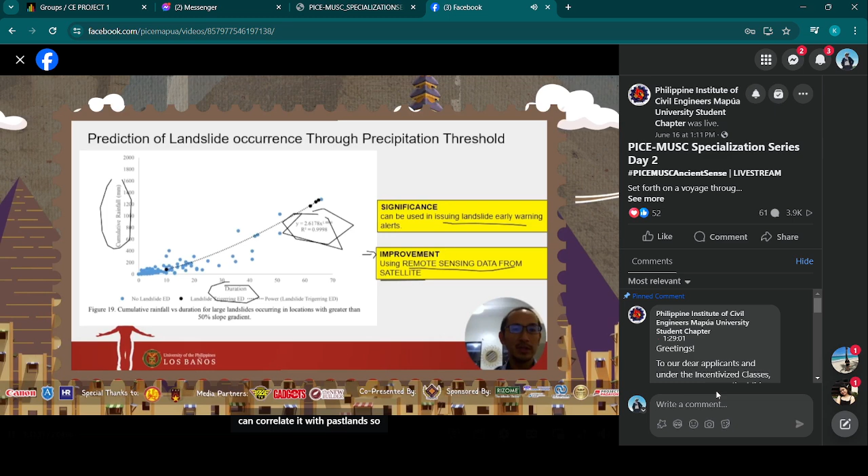Then improvement do sa mga naghahanap ng thesis, I recommend na mag-research kayo about remote sensing data from satellite. Yung mga satellite sa space, namomonitor na nila yung movement, kung eventually anything namomonitor nila. So you just have to retrieve yung data so you can correlate it with past landslides. I will leave this up to the students, i-search nyo nila: remote sensing data from satellite for landslide applications.

So improvement of shear strength. We want to improve shear strength kasi nga nag-fail yung ating slope sa interface. Ang isang factor doon is yung shear strength at the interface ng ating slope. Kaya pwede itong, so these are some past theses of my students. We want to add some admixtures sa soil para tumaas ang kanyang shear strength.

In this past thesis of my student, ang ginamit niya is recycled, discarded waste glass. Itong picture na to is in powdered form. Dahil nga imimix siya sa soil, kailangan siyang i-grind.

One particular thing na gusto kong i-highlight is hindi tayo pwedeng pumili ng kahit anong materyales, basta maisipan natin na ihalo sa soil. Ang kailangan is meron kayong prior research or background do sa inyong materials na pipiliin. So in this case, nagpa-chemical composition test yung aking student. It came out na yung SiO2 and calcium oxide niya is mataas.

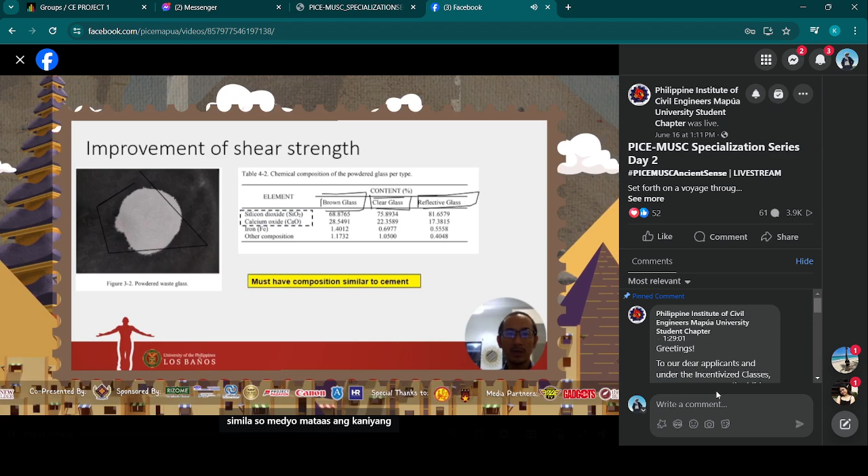Tatlong glass yung kanyang kinonsider: brown glass, clear glass, and reflective glass. Sa results naman, medyo mataas yung mga naging percent composition ng SiO2 and yung calcium oxide. Ang ginamit niya sa kanyang thesis, if I'm not mistaken, is itong clear glass. Basically what we are after is yung composition ng inyong materials should have composition similar to cement. Ang cement, medyo mataas ang kanyang calcium oxide and SiO2. Para eventually may expect natin na pag hinalo natin yung ating waste material sa soil, merong chance na mag-improve or tumaas yung shear strength.

Going to the results of our student's thesis. This is the test soil sample, about 25mm diameter by 60mm height. Then it was subjected - we're fortunate here in UP to have a triaxial test machine. So these soil samples are subjected to our triaxial test.

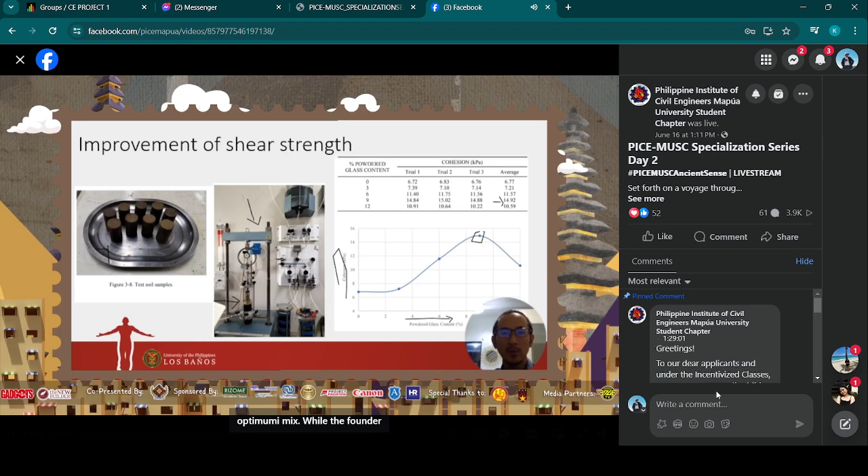Based on the results of my student, we can see that as the percent glass content increases, the cohesion increases up to a certain point, which is 9%. Based on this graph, we can conclude that 9% powder glass content raised the cohesion up to 14.92 kilopascal. After that, it went down. So what we can conclude here is that 9% is the optimum mix for the powder glass content when mixed with soil.

But this is still subject to further statistical testing for our conclusion to become valid. I will leave this up to you.

This is also one particular topic of interest for me since UPLB is an agricultural school. So this is still about improvement of shear strength in geotech, but using grassroots. Since there's a lot of grass in UP being an agricultural school, this picture is particularly from a hybrid napier grass.

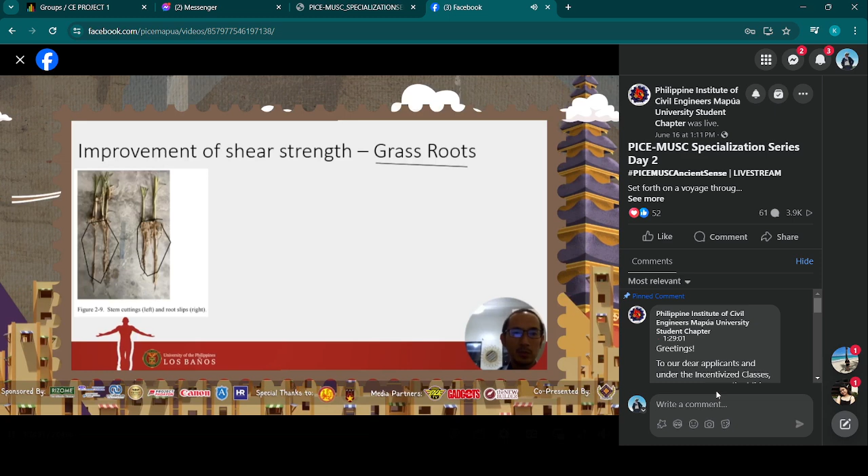What we're interested in particularly is quantifying the increase in shear strength of grassroots in soil as the grassroots increase. In this test, the grassroots in soil is subjected to a direct shear test machine. Then also, same concept, we're investigating the increase in shear strength.

Earlier we measured cohesion; this time, angle of friction is our measure. Month 0 or the control is just the soil alone. Month 1 is when it already has roots. Month 2 means the grass is 2 months old, month 3 and so on.

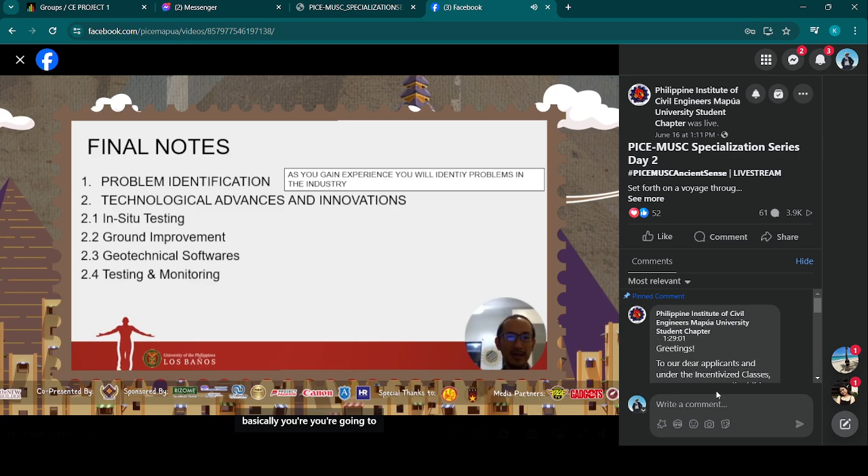So basically, this is kind of my conclusion for my presentation - problem identification. Basically, you're going to learn it as you gain experience. You will identify problems in the industry.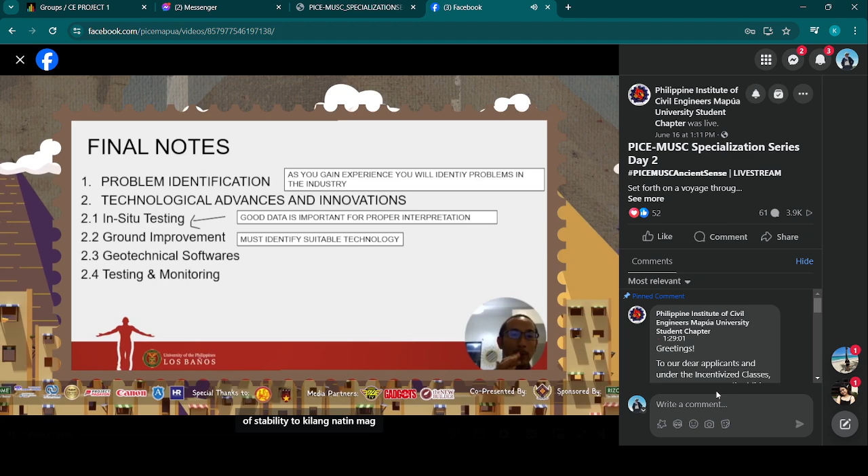Technological advances and innovations - in-situ testing is very critical because good data is important for proper interpretation. For us to analyze correctly, we need good data, whether for ground improvement or slope stability. We need to identify, as part of the job of the geotech engineer, what is the most suitable technology or approach for that particular problem.

Ground improvement - for ground improvement, for landslides, the recent trend is the use of waste materials for improvement. But not all waste materials are applicable, so we must do prior research or testing on our materials to see if they have potential as a soil stabilizer or improvement.

My notes on geotechnical software: software is only as good as the data from the soil testing and the experience of the user. Let's not be too reliant on the output of software. The role of the engineer should still be to do the thinking - the software is only our tool.

Testing and monitoring trends will most likely involve the incorporation of low-cost electronics and the use of internet in testing and monitoring. Just search for it - accelerometers, you can already buy those on Shopee. If you have a background in electronics, or if you're in Mapua, you can tie up with electrical engineers for thesis work - that can be discussed, as a joint project between electrical and civil engineering. Then there's also the use of Wi-Fi for wireless monitoring, which is already being used.

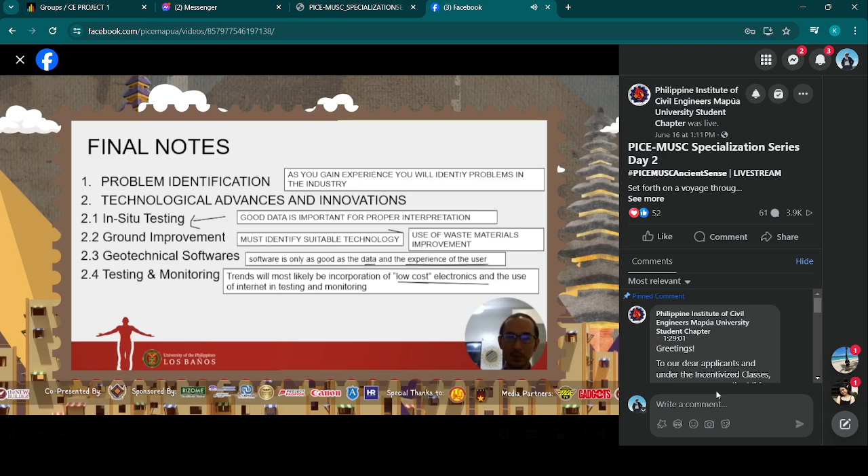And that, my dear audience, is Engineer Andre Cruz. Especially, it was such a beautiful talk with so many insights, especially when it comes to...